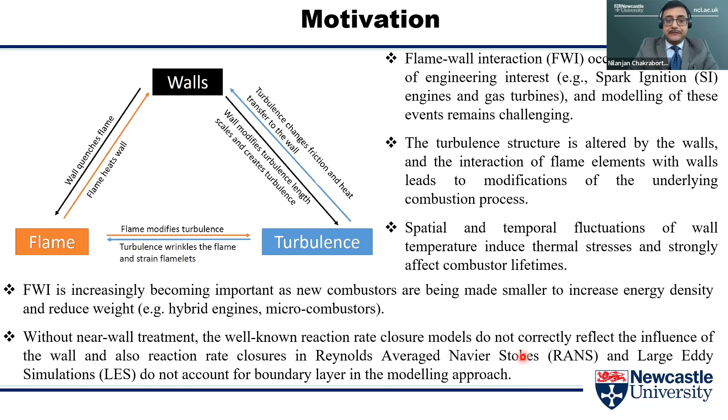Now, traditional combustion models are mostly devised for flows where combustion takes place away from the wall. Wall is almost non-existent in most of the combustion modeling literature so far. However, if we have to consider flame wall interaction in the case of development of the new generation combustors, we have to consider the presence of wall and the effect of wall on the reaction rate closures in the context of Reynolds average Navier-Stokes or large eddy simulations. And that's where we are coming.

So I'll give a very, very brief introduction to direct numerical simulation and what it means. This is the traditional turbulent kinetic energy spectrum diagram. Here, kappa is the wave number, which is inversely proportional to the length scale of turbulent eddies. In the case of direct numerical simulation, we resolve up to this point. Please note, as kappa increases, length scale decreases. So we resolve up to a length scale, which is commonly known as the Kolmogorov length scale, which is the smallest length scale of turbulence. So the grid size needs to be smaller than the Kolmogorov length scale.

In the case of Reynolds-averaged Navier-Stokes simulation, the grid size remains of the order of the integral length scale, where you get the highest value, more or less, for the energy spectrum. Now let's try to actually visualize how it works based on a simple jet flow. If you carry out DNS, you will get this kind of picture for the instantaneous mixing field. If you do RANS, you will get this. So clearly you can appreciate there's a loss of information from here to there.

However, the physical information doesn't go away. You have to represent that physical information through models. Now, model is a glorious name for approximation. So the fidelity of this kind of simulation depends strongly on the accuracy of the models. And large eddy simulation falls somewhere in between. So anything from here onward is unresolved in RANS, and that needs to be modeled. In the case of LES, it needs to be modeled for this part. And in DNS, I have exaggerated this part, but nothing interesting happens here.

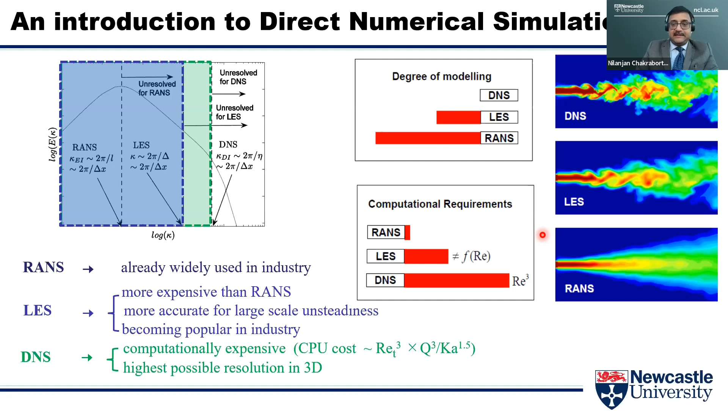So DNS so far has been limited to academic applications and simple configurations, but the physics that one can obtain from direct numerical simulation can be used for the development of high fidelity RANS and LES closures. So first, I'll talk about a very simple configuration of flame wall interaction, which is called head-on quenching configuration. Here, the flame normal aligns with the wall normal direction. So for the time being, don't look at the animation.

Here I have an isothermal wall. Here I have cold gas. Here I have reactants. Here I have products. The flame moves towards the wall. Let me introduce some variables here. First is the reaction progress variable, which is defined based on the mass fraction of a species alpha in this manner. The subscript 0 stands for the values in the unburned gas. Infinity stands for the values in the fully burned gas. The way it is defined, the reaction progress variable increases monotonically from a value of 0 in the unburned gas to unity in the fully burned gas.

Similarly, I can define a non-dimensional temperature, where T is the instantaneous temperature, T0 is the unburned gas temperature, and T adiabatic is the adiabatic flame temperature. Two quantities are very important from the point of view of flame wall quenching. One is the normalized wall heat flux. Here, rho 0 is unburned gas density, Cp0 is the specific heat at constant pressure in the unburned gas, SL is the laminar burning velocity for premixed flame. Peclet number, I know that Peclet number is defined in a different manner in the heat transfer literature, but one can get the equivalent form. And this is the form which is used for flame wall interaction, where X is the wall normal distance of a given non-dimensional temperature isosurface, and delta is the flame thickness. Now, I have considered the T equal to 0.9 isosurface because in the unstrained laminar premixed flame, maximum heat release takes place around this for methane air flame.

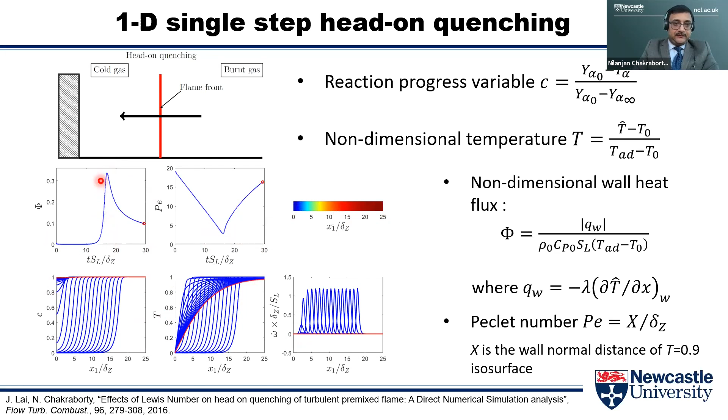So let's look at the animation, but beforehand, I will tell you how the reaction progress variable evolves with time is shown here. Non-dimensional temperature evolves with time is shown here. This is the reaction rate. And these two are the temporal evolutions of the heat flux and the Peclet number. So let me go back, and now you can see the flame is approaching the wall. When the flame is away from the wall, C and T are identical, but as soon as the reaction rate goes to 0, the coupling between C and T is broken. Once again, you can see when the flame is away from the wall, the heat flux is 0. But as the reaction rate goes to 0, you get the maximum value of wall heat flux. That instant coincides with the instant when the Peclet number is the smallest. And after that, the isotherms diffuse away from the wall. And as a result, the heat flux drops, and the Peclet number increases further. Now, one non-dimensional quantity plays a very important role in this behavior.

That's the Lewis number, which is given by the ratio of thermal diffusivity to mass diffusivity. Let's see what really happens. Whatever I mentioned earlier is shown here. Two quantities are of primary interest: the maximum value of normalized wall heat flux and the minimum value of Peclet number, because this gives us a measure of the quenching distance, and this is the maximum heat flux value.

Now, Lewis number 1 is representative of a stoichiometric methane-air flame. Now, let's see what happens when the Lewis number changes. Lewis number 0.8 is representative of 20% hydrogen by volume blended with methane with an overall equivalence ratio of 0.6. And this is representative of an ethane-air flame with an equivalence ratio of 1.2.

But if you look at the minimum Peclet number and maximum wall heat flux, one can see the minimum Peclet number actually decreases with increasing Lewis number. Just the opposite trend is observed for the maximum wall heat flux. What really happens when the Lewis number is smaller than unity? The thermal diffusion is weaker than the mass diffusion, so the reactants actually diffuse faster into the flame than the heat diffuses from the reaction zone. As a result, the isotherm based on which the Peclet number is defined remains away from the wall when the flame quenching takes place. Just the opposite thing happens for Lewis number 1.2.

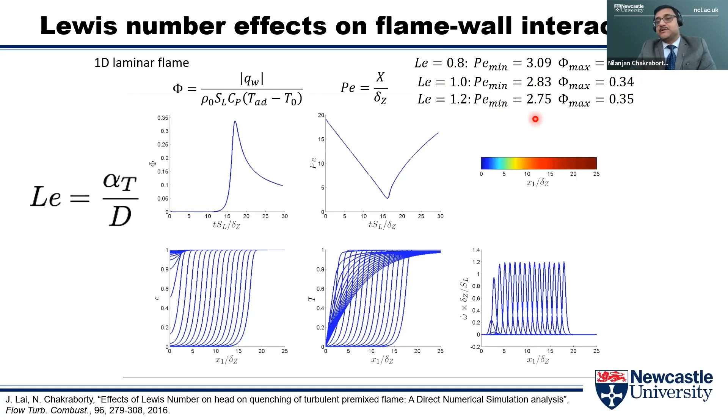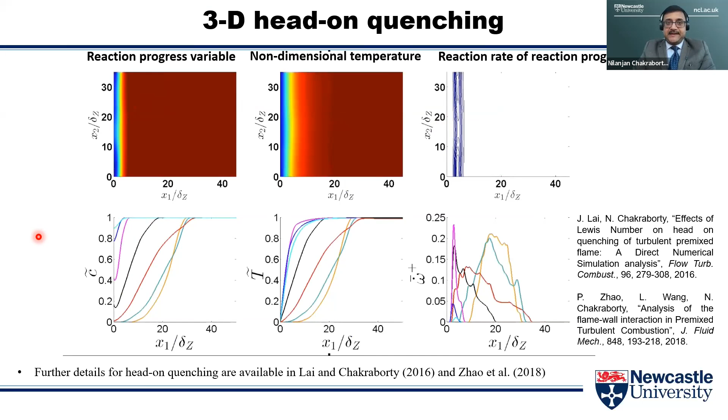So if we look at what happens in a 3D flame wall quenching under turbulent conditions, exactly similar behavior. Qualitatively, the behavior remains the same, but the Lewis number affects it significantly. The first important thing to note is that in the case of Lewis number 0.8, so if we take a hydrogen blended methane flame, the maximum wall heat flux can be much greater than the maximum wall heat flux obtained under the laminar condition. What happens to the quenching distance? The quenching distance can go below the minimum quenching distance under the laminar condition.

What's the reason? Let's look at these kinds of wrinkles under the turbulence. Here, the flame is convex towards the reactants. Here, the focusing of fresh reactants takes place at a faster rate than the defocusing rate of the heat from the reaction zone. So effectively, in these zones, you have high reactant concentration and high temperature. So these zones actually burn faster. In actuality, you can obtain super-adiabatic temperatures in these zones. As a result, these zones are more resistant to quenching, and they can reach closer to the wall before quenching, and that gives rise to the higher heat flux and lower quenching distance. Just the opposite thing happens where the flame is concavely curved, but these zones are away from the wall, so they really don't affect the maximum wall heat flux and minimum Peclet number.

Lewis number 1.2, just the opposite thing. Now the defocusing rate of heat takes place at a faster rate in comparison to the focusing of reactants into the reaction zone. So here I have less concentration of reactants and low temperature. So these zones actually quench more readily. So here the maximum wall heat flux remains more or less comparable to the laminar value. Quenching distance remains comparable to that in the laminar case.

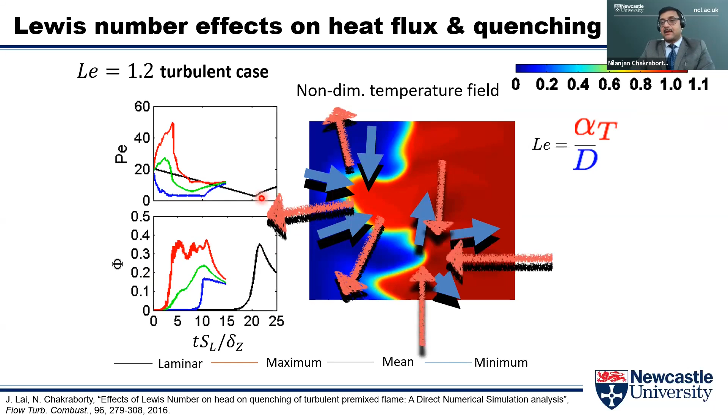Now, so far, whatever I discussed is based on single-step Arrhenius-type irreversible chemistry. How does chemistry play a role in flame-wall quenching, especially in the case of head-on quenching? If you look at the non-dimensional temperature distribution with time, it is qualitatively the same. If you look at the reaction progress variable distribution between single-step chemistry and detailed chemistry, they are the same. One thing to note: in the case of isothermal wall boundary condition, because of the Dirichlet condition, the temperature remains 0 in non-dimensional form at the wall, where x equals 0. Whereas in the case of species, the wall-normal flux is 0.

As a result, when the flame quenches, the reaction progress variable still increases because the unburnt reactants actually diffuse to the interior of the domain. Omega C is the normalized reaction rate of the reaction progress variable. As time progresses, it drops to 0 because of the flame quenching. In the case of single-step chemistry, the normalized heat release rate and normalized reaction rate are qualitatively similar. That is no longer the case for detailed chemistry. One can see there is quite a bit of heat release at the wall, even when the reaction rate has gone to 0 for the reaction progress variable, which is defined based on the methane mass fraction here. What really happens?

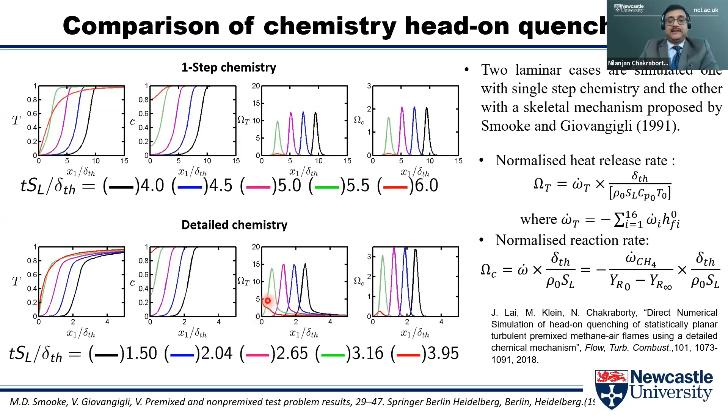Now, if you look at the instantaneous reaction rate, they are given by this kind of generic expression. You can appreciate it's a highly nonlinear function of temperature. As a result, whether you consider mean in terms of Reynolds averaging or filtered reaction rate, it is not a function of Favre mean temperature. Favre mean is a density weighted mean given in this manner. As a result, this kind of function you cannot actually use for modeling the mean reaction rate.

In the case of RANS, the average value of the molecular diffusion goes to 0, and one often actually uses this kind of expression to model the mean reaction rate. Effectively, in this approach, we model the flame surface area to volume ratio and assume that per unit surface area, the reactant consumption is similar to that of a laminar flame. So let's see how it actually works.

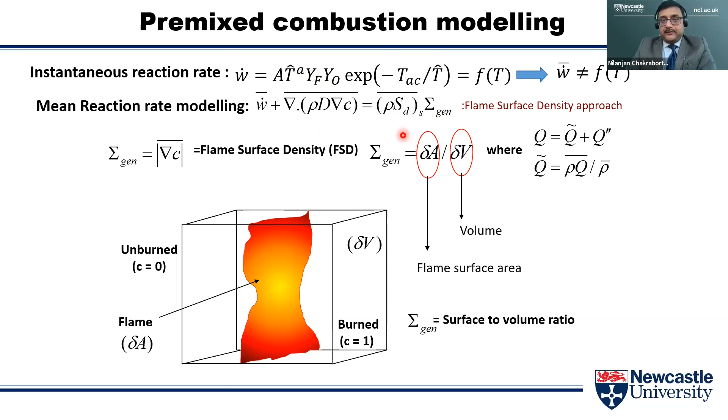This is the flame surface density. This is the conventional model. And you can see when the flame wall interaction occurs, whether you use single-step chemistry or detailed chemistry, the conventional model significantly over-predicts the reaction rate close to the wall. So the scalar gradient doesn't go to 0 at the wall, whereas the reaction rate does. And as a result, the conventional model fails.

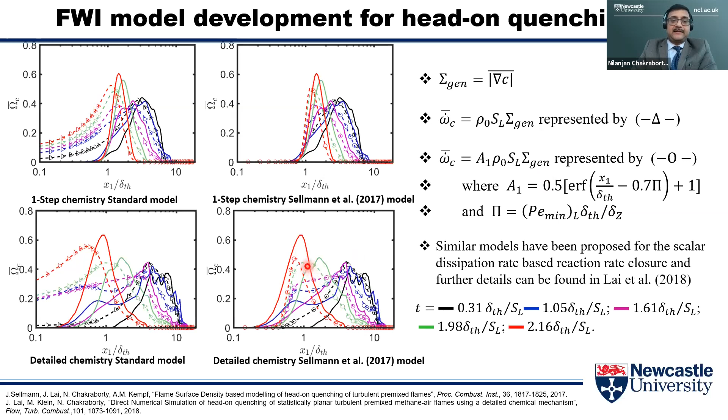We have modified that model where we actually involved the minimum quenching distance explicitly into this model expression. There are small discrepancies, but in the Reynolds average context, that's not unusual. At least it does a much better job in comparison to the existing model.

What happens to hydrogen flames? Now, why hydrogen flame? Because hydrogen is actually considered the fuel for the future. In the UK, we are moving from the standard hydrocarbon fuels to hydrogen fuels to reduce greenhouse gas emission. So first, let's look at methane air flame. When the reaction rate drops, I still have heat release at the wall, as I mentioned earlier.

This behavior in the case of hydrogen air flame and for the normalized reaction rate is qualitatively similar. But if you look at the wall, if you look at the heat release, as it progresses with time, the heat release is significant at the wall, although the temperature is the lowest at the wall, and this heat release rate is comparable to the heat release which takes place within the flame when the flame was away from the wall. So obviously, the mechanism by which this heat release takes place at the wall is different from the heat release which happens within the high temperature region within the flame.

I mentioned species like HO2, H2O2. Those are more abundant in hydrogen air flame in comparison to hydrocarbon air flames. But in addition to that, at the high temperature zones, you get radicals like H, OH, which play an important role in terms of the chain propagating reaction. Now, although when the flame quenches, we still have those intermediate species, and they can actually still give rise to chain propagation reaction even at low temperature, and that can give rise to a significant amount of wall heat release.

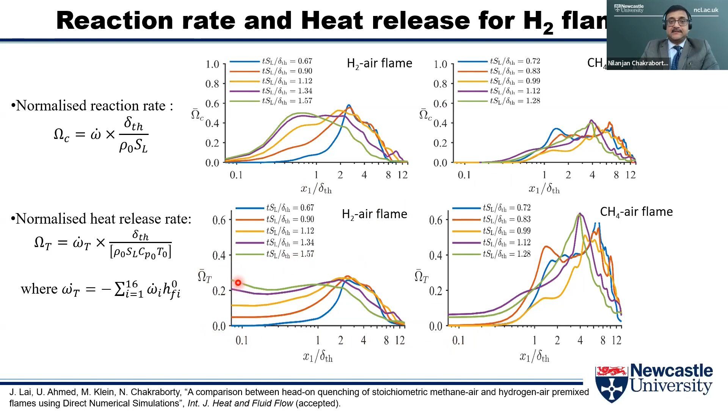Implications for that. So the model that I mentioned earlier, let me show it here again. One can see the conventional model really does not capture the mean reaction rate. The model that we came up with works both for methane air flame as well as for hydrogen air flame. However, it is relatively easier to actually model the reaction rate of reaction progress variable because that's based on major species mass fraction. But it is not really easy to actually model the wall heat release in hydrogen air flames because of the major role played by the intermediate species. It is a really, really new finding from a very new publication. There's a lot to be done in order to actually model hydrogen air flame wall interaction for next generation combustors.

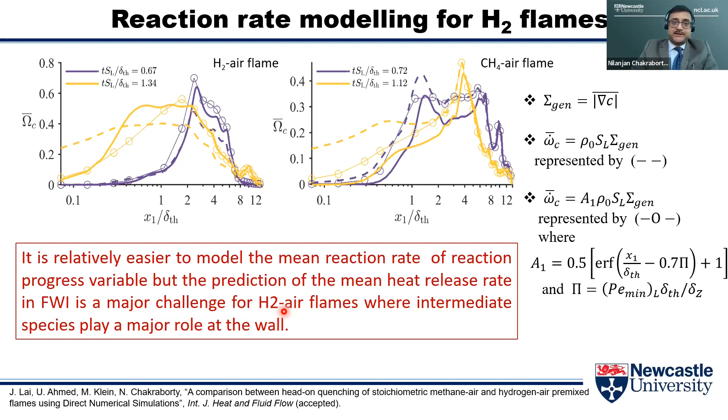So now I'll go into some discussion of flame wall interaction in turbulent boundary layers. We considered two configurations. Here is a rod stabilized V flame. We kept the flame holder closer to the bottom wall so that it more readily interacts with the bottom wall, whereas the flame wall interaction for the top wall takes place at a later stage in terms of the streamwise distance. It also enables us to actually compare the upper branch with the lower branch. H here is the channel half height. It took us about 500 million grid points. It's representative of a methane air flame.

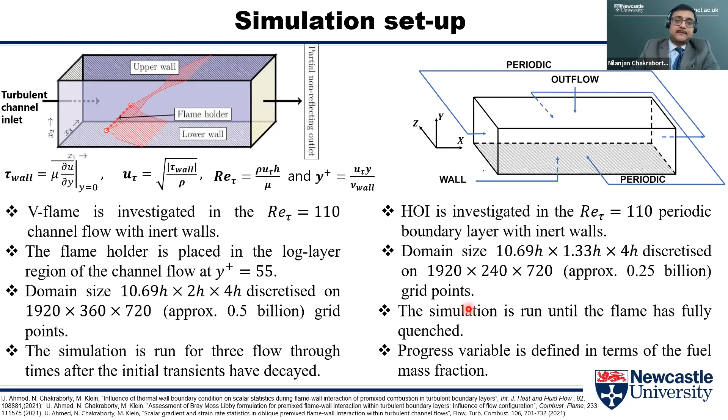This is another alternative configuration with a periodic channel flow. Again, H is the channel half height, but we chopped the top of the channel for computational economy. Even then, it involves about 0.25 billion grid points. On Cray XC30 architecture, these two simulations involved about 1,500 processors for almost 25 to 35 days continuous runtime. So these are really, really expensive simulations.

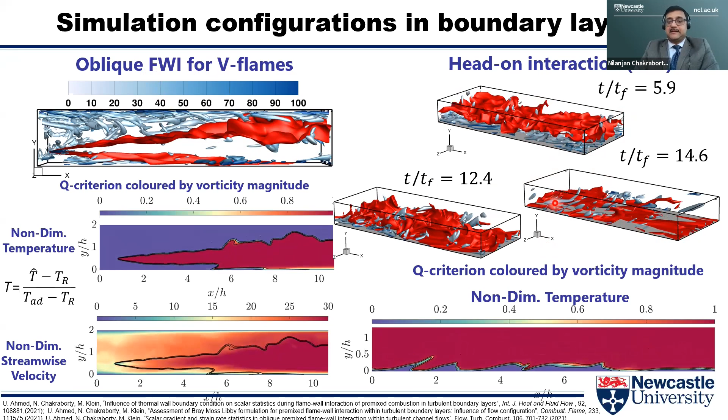So once again, this is the time evolution of how quenching happens. Please note we have carried out these simulations for both isothermal as well as adiabatic wall boundary conditions. In the case of head-on interaction, in the case of isothermal wall, it ultimately quenches. In the case of adiabatic wall, ultimately the flame does not stay within the domain because it actually consumes all the reactants as it approaches towards the wall.

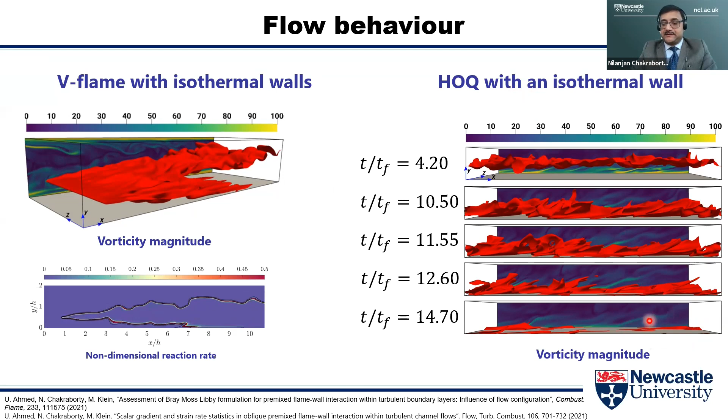Boundary condition plays a very, very important role. You can see from the isosurface here that the flame is stretched towards the streamwise direction in comparison to the adiabatic wall. If we look at it in an average sense, you can see these isosurfaces of reaction progress variables are bent towards the upstream. What really happens, reaction rate is 0 on the wall for isothermal case. For adiabatic case, actually reaction can take place on the wall surface. As a result, the flame tries to go upstream, but in this particular case, upstream flow is greater than the laminar burning velocity so that it cannot propagate.

In the case of V flame, this is the situation in a mean sense. So thermal expansion takes place mainly in the flame normal direction, which has a component in the mean flow direction. And that sets up a stronger velocity gradient. As a result, in the reacting condition, the friction velocity actually increases in comparison to the non-reacting case. And this trend is more prevalent in the adiabatic case because the flame does not quench, the thermal expansion effects are stronger.

However, in the case of head-on interaction, the friction velocity with respect to the non-reactive friction velocity decreases as the flame wall interaction takes place. In this case, the flame moves like this. Thermal expansion effects are mostly in the wall normal direction. As a result, the redistribution of momentum from the streamwise direction to the wall normal direction gives rise to this drop. But this drop is less stiff here in the case of adiabatic case.

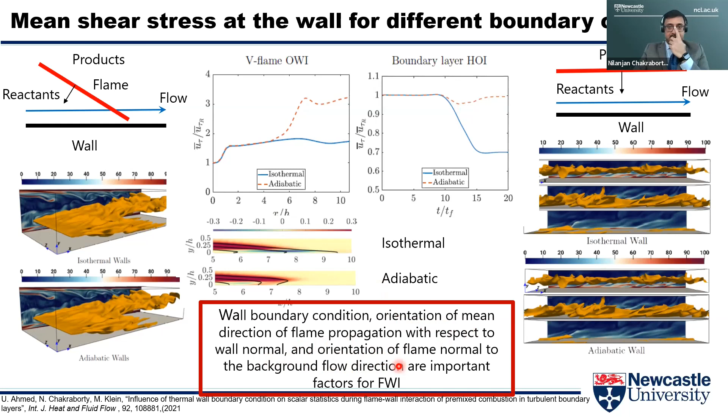So wall boundary condition plays a very, very important role. Orientation of mean direction of flame propagation with respect to wall normal, orientation of flame normal to the background flow direction, all of them are very important in the case of flame wall interaction in turbulent boundary layer. So what happens to the textbook material? If we look at the log law, it really fails for flame wall interaction. This relation for the viscous sublayer still holds.

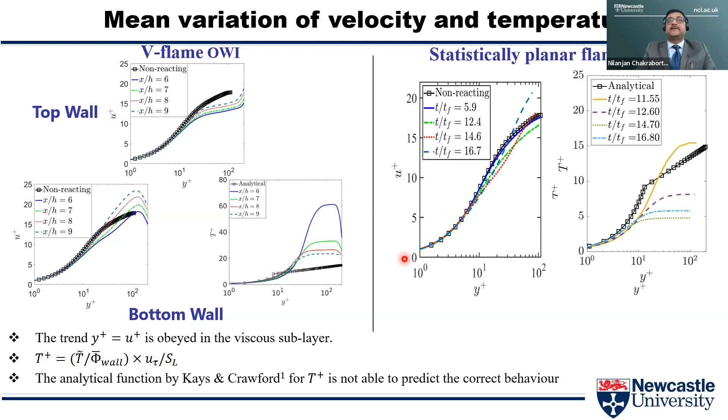What happens for the thermal boundary layer? The well-known relation by Kays and Crawford fails miserably here. So effectively, all the textbook materials in the heat transfer literature are invalid in the case of flame wall interaction. Why is that the case? In order to actually demonstrate that, I'll go into boundary layer flashback just as an example for hydrogen-rich premixed flames. And I'll take the turbulent kinetic energy transport equation.

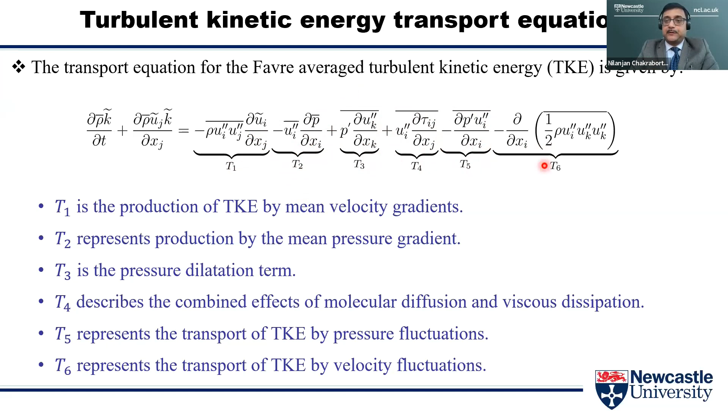This is how the flashback in hydrogen-rich flame in the turbulent boundary layer looks like. Once again, these are the Q values. This is the T equal to 1,700 K isosurface. These green zones are the zones where the flow reversal takes place because the flow diverges ahead of the flame, and that sets up adverse pressure gradient. If we look from the top view, in these white zones, you have negative shear stress.

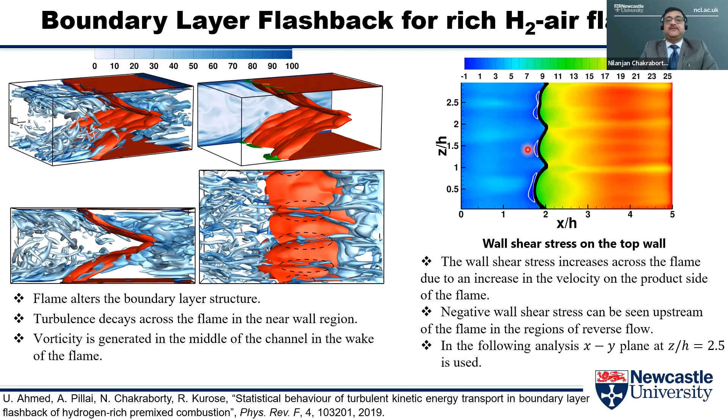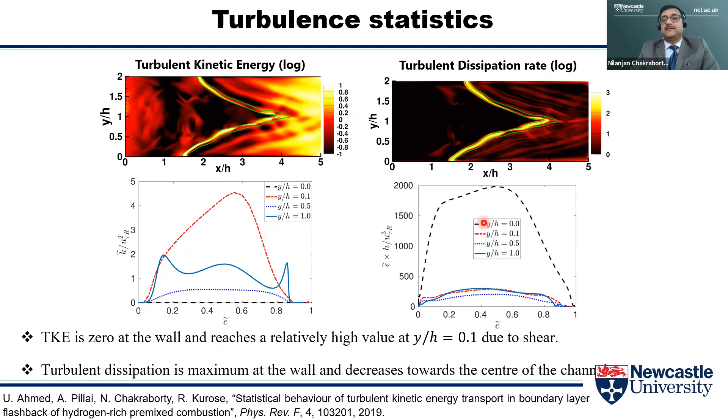So in other words, it doesn't work like a production term. It works like a sink to turbulent kinetic energy. As a result, the local equilibrium between the production and dissipation, which is often invoked in the non-reacting turbulent flow, fails completely in the case of flame wall interaction.

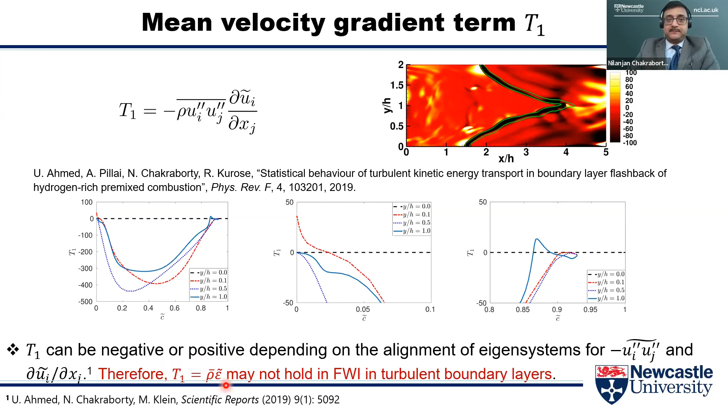It is rendered invalid in the case of a flame wall interaction for turbulent boundary layer, and this is the prerequisite for derivation for log law. And that's why the log law really doesn't work in the case of turbulent premixed flame wall interaction. Now, with that, I will go into another material where

we will talk about the interrelation between turbulent burning velocity and wall heat flux using energy integral equation. So those of you who have taken convective heat transfer courses, they have already seen this equation several times, but here we have an extra term which comes because of the mean reaction rate. And in this case, H stands for sensible enthalpy. And once you actually integrate these terms between two locations in the streamwise direction, one gets this equation.

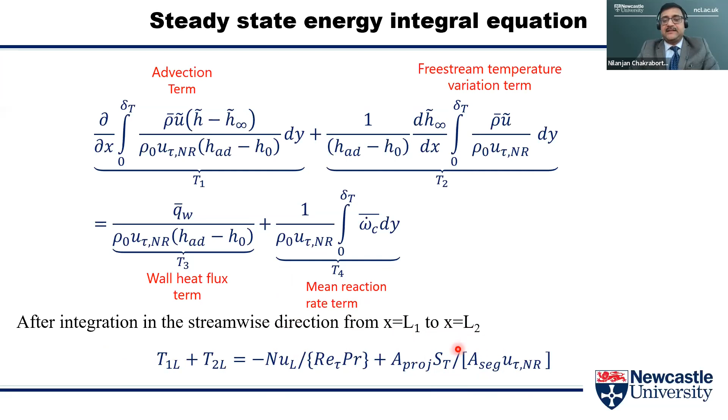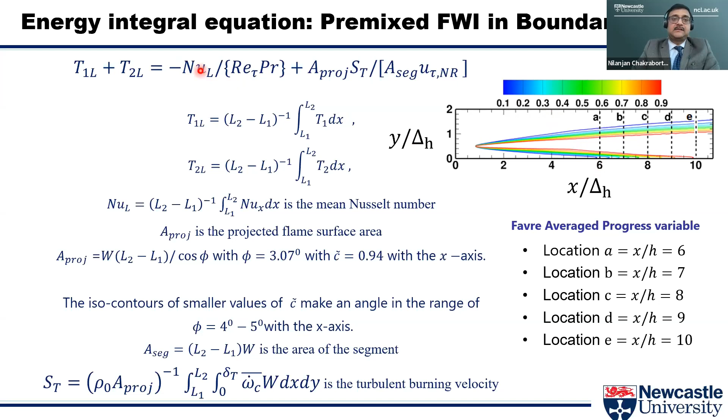Obviously, NuL is the Nusselt number. A projection is the projected flame area. ST stands for the turbulent burning velocity, and A segment is the area on the wall. So we have considered steady state energy equation for the free flame, which I showed earlier. This is the definition of turbulent burning velocity. T1L, T2L are defined in this manner. Minus sign for Nusselt number because we are actually losing heat through this bottom wall, and that's taken care of by this negative sign. Nusselt number is just the magnitude.

So first important thing to notice that we have evaluated each of these terms at this location, 6, 7, 8, 9, 10, in terms of the streamwise location normalized by the channel half height. T1 plus T2 remains equal to T3 plus T4. T2, the free stream temperature variation term, is negligible in this case, so we can actually ignore that for this particular configuration at least.

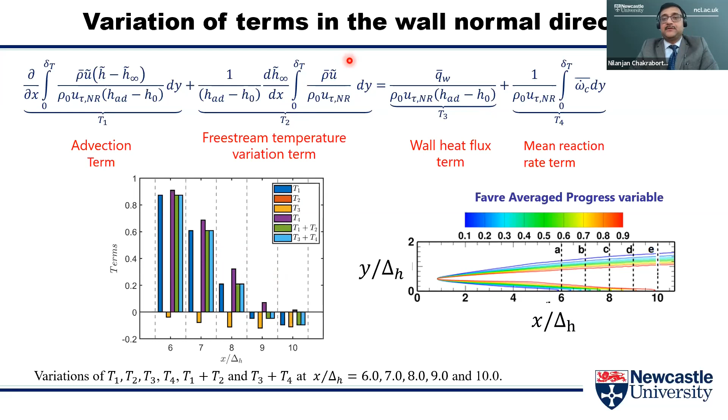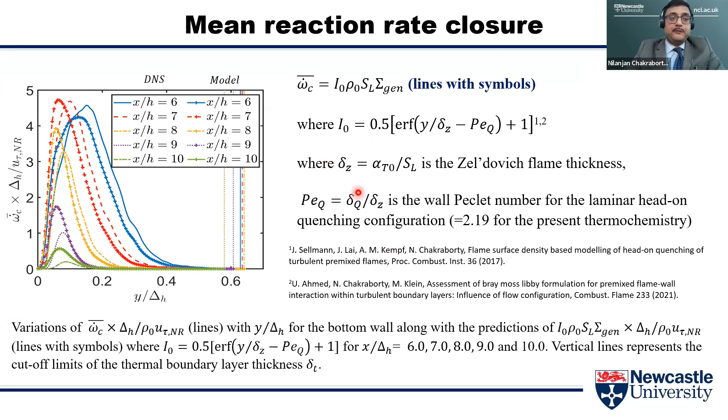Here I am showing the reaction rate closure that I mentioned earlier. The first thing to note, these vertical lines are the edges of thermal boundary layer. So first thing to note that the reaction rate actually takes place within the thermal boundary layer. What happens to the model performance? It does reasonable job away from the wall, but as soon as the quenching starts, there is quite a bit of discrepancy. Please note this model was proposed for head-on quenching, and here we are dealing with oblique flame quenching. So obviously, there is a huge scope for improvement of this kind of models for general flame wall interaction.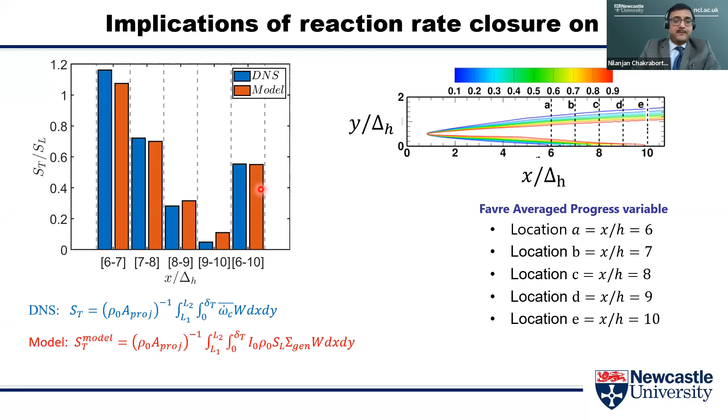In other words, it is probably not a good idea to actually estimate Nusselt number in the case of flame wall interaction based on the turbulent burning velocity. One thing to note, based on this equation, it is clear that turbulent burning velocity and Nusselt number are not two independent parameters in flame wall interaction. If you know one, you should be able to find another. T1L and T2L are functions of mean variations of velocity and temperature within the thermal boundary layer. They're relatively easy to measure experimentally.

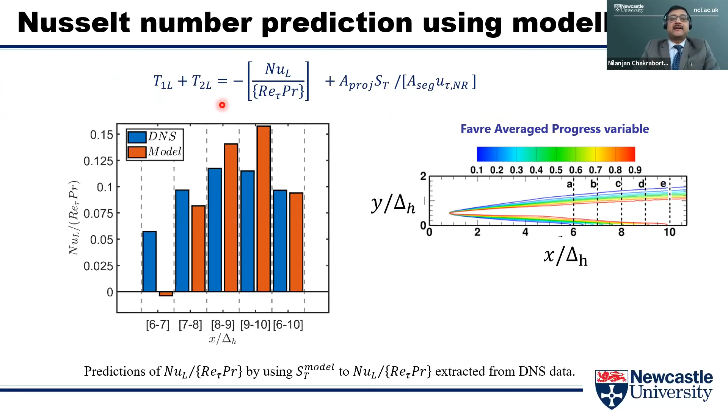Experimentally, it is relatively easier to measure the wall heat flux. So if one can actually measure these three quantities, it should be possible to actually measure the turbulent burning velocity within the thermal boundary layer. Experimental diagnostics of turbulent burning velocity directly in thermal boundary layer in flame wall interaction is almost impossible, because the temperature changes by 800 K in a span of 1 millimeter. Very often the flame quenches 1 micron distance from the wall. But this actually gives you an insight how one can actually use the experimental data to estimate turbulent burning velocity.

And that brings me to the conclusions. The mean behavior of velocity and temperature are significantly affected by flame and flow configuration in flame wall interaction.

Standard formulations of RANS and LES need to be revised to take into consideration the flame wall interaction effects in the boundary layer. Production dissipation balance in the turbulent kinetic energy equation does not necessarily hold during flame wall interaction. Turbulent burning velocity and Nusselt number are linked. They are not independent parameters, but if one has measurements for mean velocity and temperature and wall heat flux, that can be used to predict turbulent burning velocity.

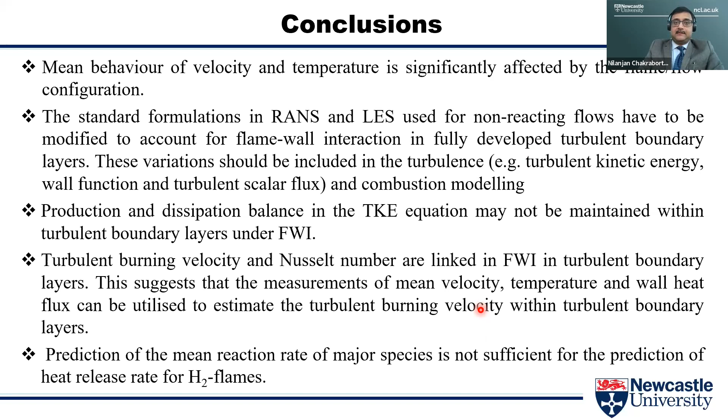Prediction of the reaction rates of major species is not sufficient for hydrogen-enriched flames, especially for the prediction of heat release rate. So we are working on several aspects of flame wall interaction. The future direct numerical simulation data will involve higher values of Reynolds number and friction Reynolds number, more involved chemical mechanisms, flame wall interaction in laboratory scale configurations, and conjugate heat transfer.

We are in the process of using DNS data to develop high fidelity turbulence models, velocity and temperature wall functions for flame wall interaction, because I showed that the usual log-law based wall functions don't work in flame wall interaction. We are using machine learning technologies based on the DNS data that we obtain for flame wall interaction modeling, and we use these for hybrid RANS LES for flame wall interaction. So lots to come in the future.